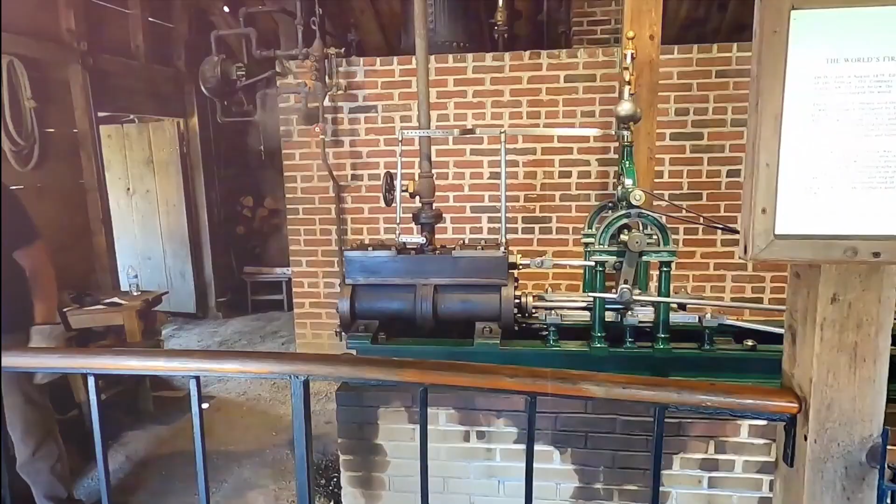Edwin Drake's first device for drilling oil isn't similar to oil rigs today. It was actually called a Drake well. Drake adapted technology from salt drilling. They began drilling using steam-powered engines to ram a drill bit into the ground repeatedly. After the drill reached bedrock, about 32 feet down, they ran into problems with collapsing walls and water-filled holes. To solve this, they drove cast iron pipes into the ground to stabilize the borehole, which was a key innovation.

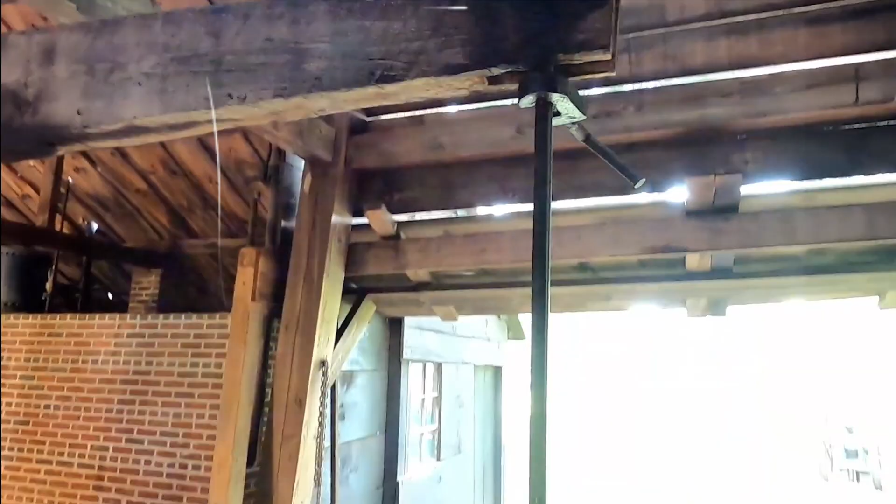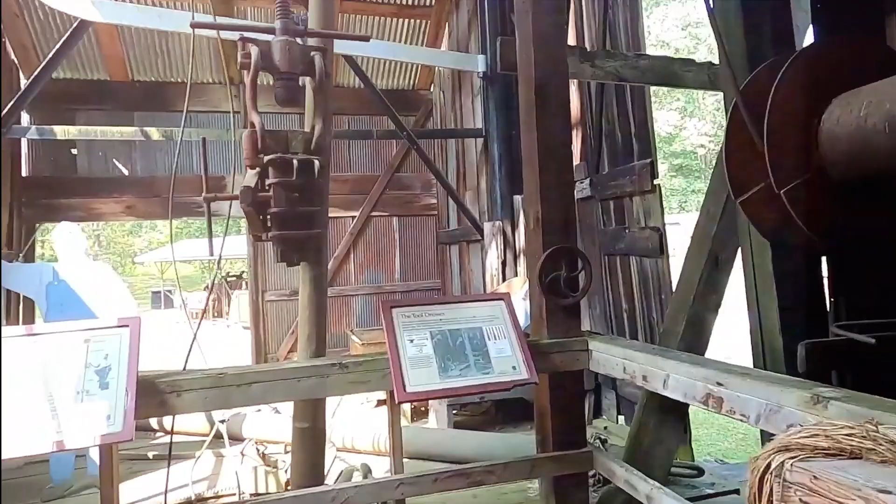The wooden engine house would have needed space for the walking beam mechanism, which rocks back and forth to drive the drill. It would also house a steam engine with its boiler and flywheel, and enough vertical clearance to handle the rig's cable system and pipe sections. A modest estimate would put the height of the engine house at around 20 to 25 feet at the peak of the roof. These were often built with gabled roof to allow extra clearance and ventilation. The floor area might have been approximately 12 by 20 feet, just enough space for machinery and a couple of workers to maneuver. On August 27, 1859, at a depth of 69 feet, the drill struck oil.

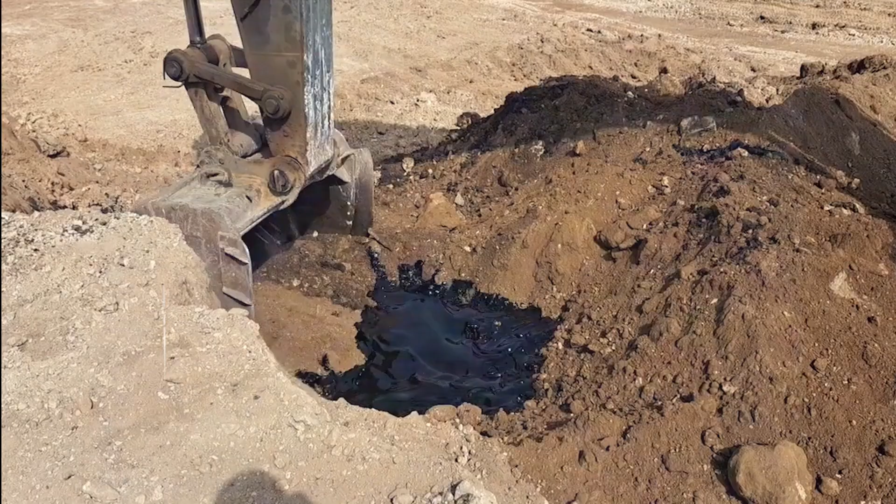It didn't gush out like we see in Hollywood movie scenes. It seeped up slowly, but that was enough. Enough to prove that oil could be tapped like water from the water table. It was enough to change the world. Drake didn't patent his method, so he died in poverty. But his grit lit the fuse of the petroleum age. Others rushed in, copied his techniques, and made fortunes.

John D. Rockefeller became the major beneficiary of Edwin Drake's toils. In contrast to a life of unfulfilling grind, the rise of Standard Oil and its founder, John D. Rockefeller, was swift and has remained sustainable till today. The Rockefeller family is still this very day a prominent American dynasty renowned for building one of the world's largest fortunes in the oil industry.

When the US government broke up Standard Oil in 1911 for violating antitrust laws, Rockefeller didn't lose his wealth, he multiplied it. The breakup created dozens of companies, many of which became giants like ExxonMobil and Chevron. Rockefeller held shares in almost all of them. His fortune ballooned to what will be over $400 billion today, making him the richest man in America at the time. The wealth became generational. The Rockefeller family established trusts, family offices, and philanthropic foundations. They invested in real estate, banking, and education.

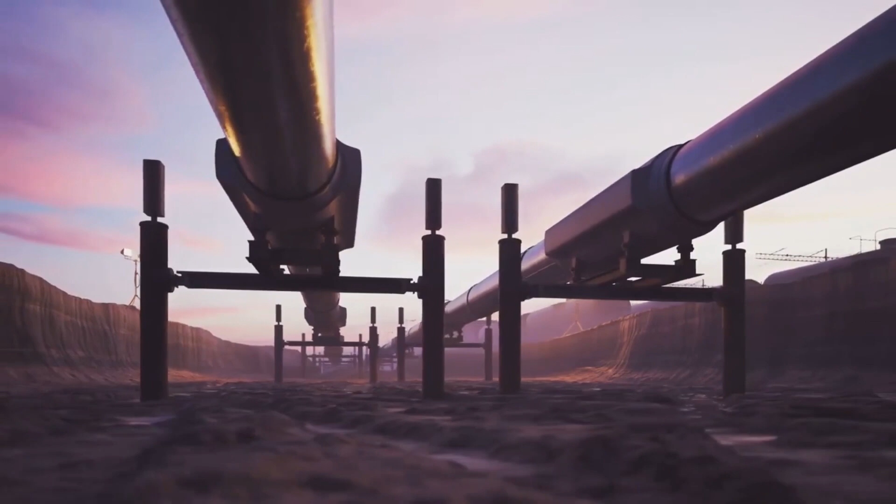The basic process of drilling for crude oil hasn't changed the fundamentals, but the technology surrounding it has seen significant advancements. Techniques like 3D and 4D seismic imaging, unconventional extraction methods, robotics, and data analytics have revolutionized various aspects of the oil and gas industry, improving efficiency and reducing costs.

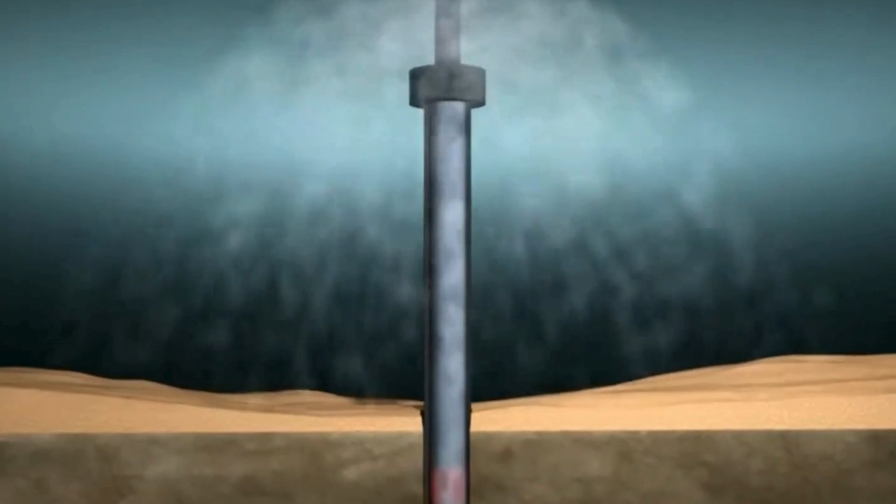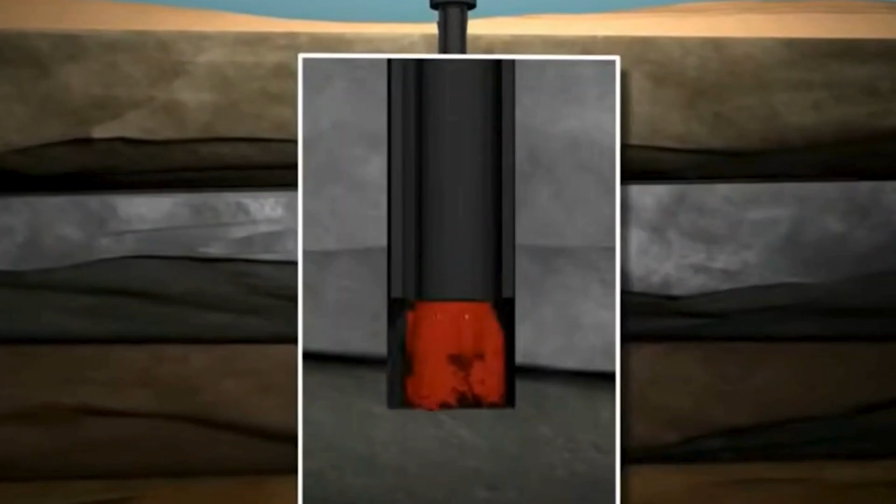Automation and robotics are playing an increasingly important role. Computer-controlled systems can drill more precisely and efficiently, minimizing human intervention and improving safety.

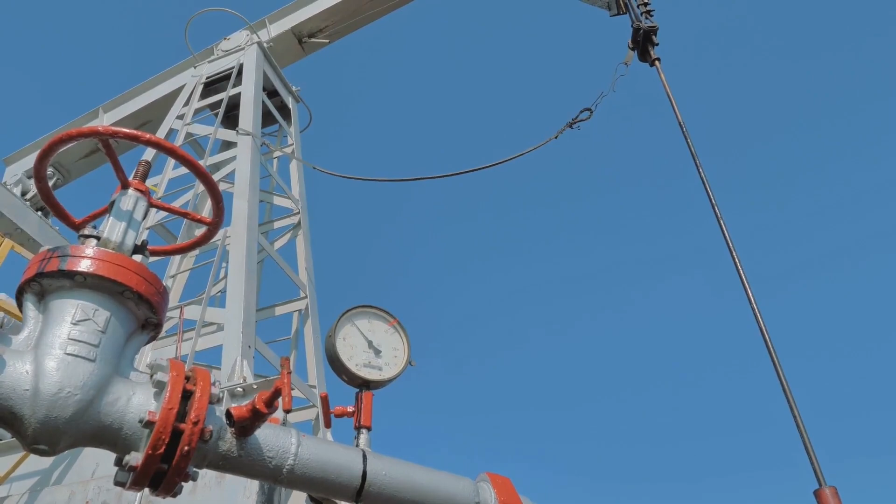Advanced techniques like hydraulic fracturing have unlocked vast reserves of oil and gas that were previously inaccessible. The use of data analytics, artificial intelligence, and digital twins allows companies to monitor operations in real time, optimize production processes, and predict potential issues.

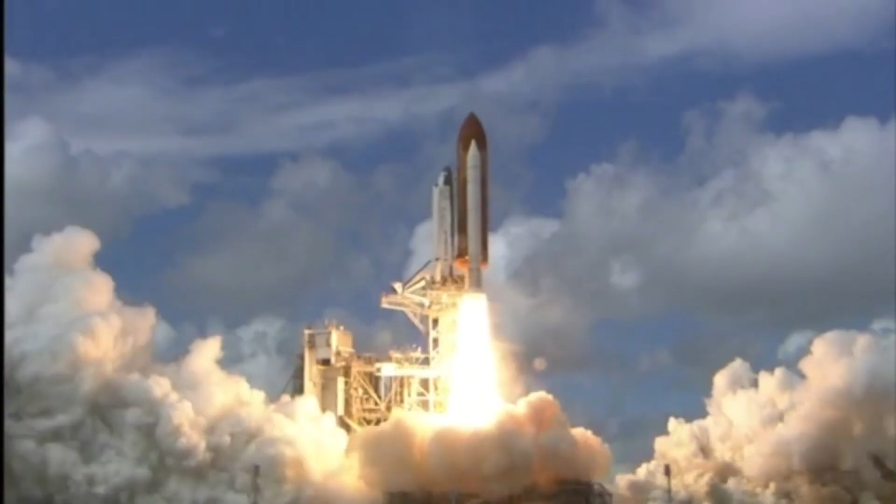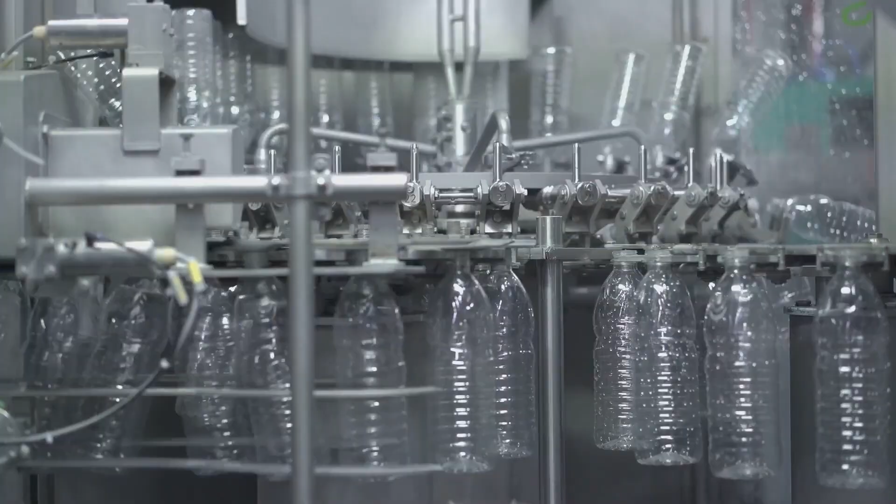Today, crude oil is primarily used to produce energy for transportation. Let's think of gasoline, diesel, jet fuel. It also serves as crucial feedstock for the petrochemical industry, which creates thousands of everyday products, including plastics, solvents, synthetic materials, and chemicals for health and cleaning supplies, as well as fertilizers and pharmaceuticals.

It's used in furniture, and then it's also used in electronics. It's used in sporting. You have balls, you have surfboards. They are all oil and petroleum products. So I think, if you're listening to this video, the next time you go out, try to spot, if you can, as many petroleum byproducts as you can see.

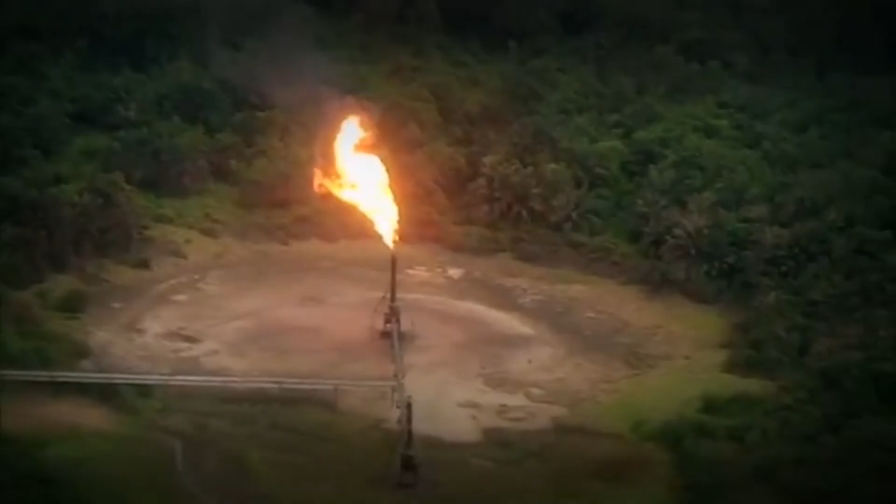So now let's talk about the cost of oil and its impact on the environment. Oil exploration, extraction, and use have numerous detrimental impacts on the Earth's environment and ecosystem. These include air and water pollution, climate change, habitat destruction, and harm to wildlife.

Oil and gas operations release harmful pollutants into the environment, including greenhouse gases like carbon dioxide and methane, which all contribute to climate change. These pollutants also contribute to smog formation and respiratory problems.

We have an interesting video that talks about air pollution in Pakistan, which is, I think, the second most polluted country in the world, and part of the reason why they experience that much pollution is due to oil extraction activities. That's one of the reasons; they have a couple of other reasons.

Oil spills, leaks, and improper disposal of drilling fluids can contaminate surface and groundwater sources, harming aquatic life and potentially affecting drinking water.

Drilling activities, pipeline construction, and oil spills can lead to soil contamination, loss of vegetation, and habitat destruction. The burning of fossil fuels, including oil, releases greenhouse gases into the atmosphere, trapping heat and leading to global warming and its associated consequences like extreme weather events.

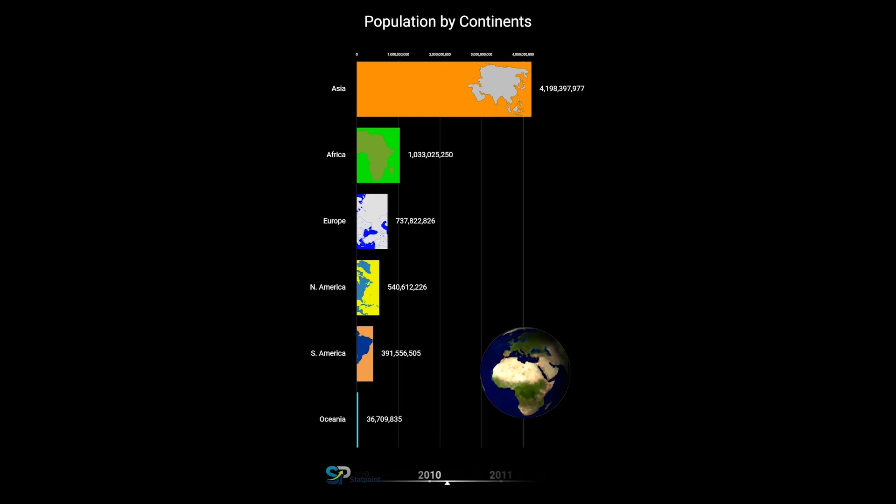The impact of crude oil on the environment far exceeds what the layman could even imagine. And in 2015, it was a problem the world could no longer ignore. The UN set up the SDG goals after much pressure to balance some of these impacts.

And just as in the oil rush, companies rushed to find oil, new inventors were similarly on the hunt for a cure.

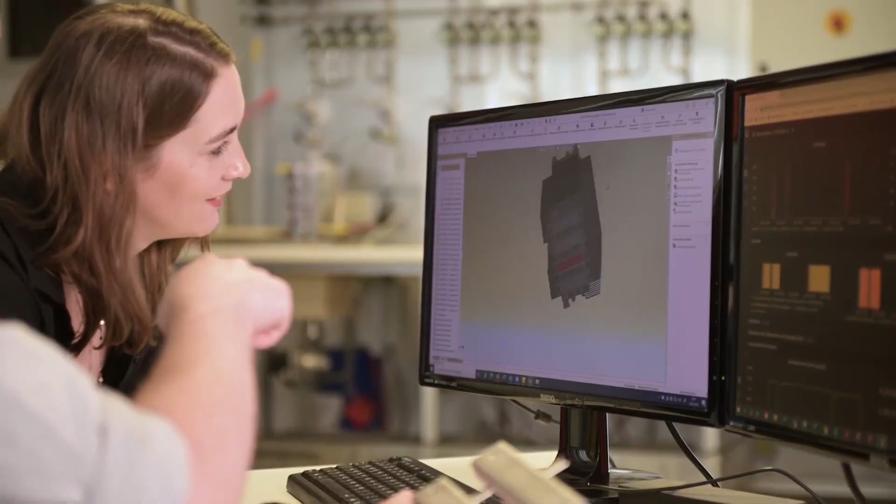One of such companies is Siqens. Siqens is an electrochemical technology company for power generation and hydrogen infrastructure. Established in 2012 in Munich, Germany, Siqens has developed innovative technologies for power generation and key applications in hydrogen separation, purification, and production. Siqens' unique HT-PEM platform has been developed in partnership with BASF and offers significantly increased tolerance to gas feed impurities, opening up a wide range of applications in the H2 economy.

In 2019, Siqens brought to the market its first fuel cell product, the EcoPort 800, as a replacement for diesel generators. The EcoPort 1500 was launched in 2020. In 2022, Siqens leveraged its experience of commercializing its HT-PEM fuel cells to develop technology for separating high-purity hydrogen from gas blends in gas networks and industrial processes.

Siqens currently employs 30 people with a broad range of expertise in the fields of electrical engineering, mechanical engineering, material science, electrochemistry, and energy. We had an amazing opportunity to sit with the CEO of Siqens, Dr. Thomas Klaue, to learn more about Siqens' technology, the growth made by its technology, and the impact on the environment.

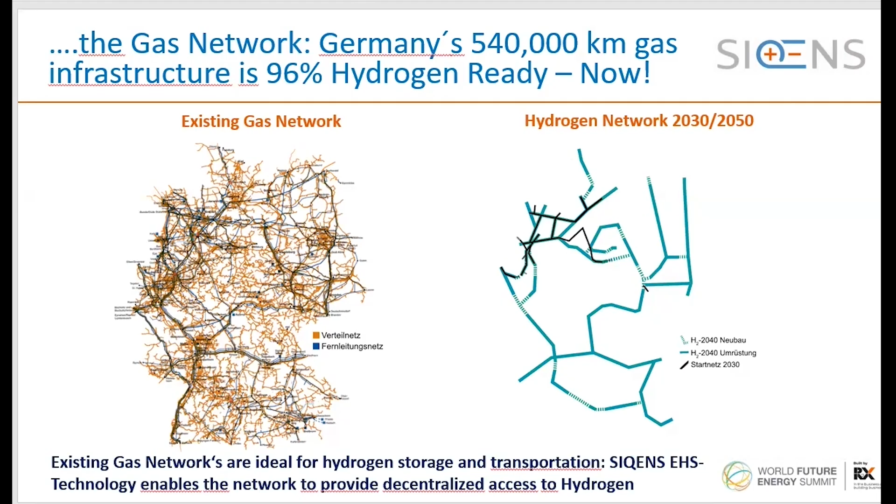We need a centralized production for economies of scale and a decentralized distribution for the supply at the point of use. And of course, the best way is to use an existing infrastructure, and I assume a country with oil and gas like Nigeria already has an infrastructure in place, so that you can use this by blending the hydrogen into the gas network. So this is a German example. Germany's gas network is 96% hydrogen ready, which means that we just need to blend it in and deblend it. And this is how it could look.

Here we have the University of Landshut in Lower Bavaria. They are using our technology to produce hydrogen out of biogases. It's a rural area with a lot of farmland, so they have a lot of biomaterials. And out of these biomaterials, they make biogas. And in the biogas, we have about 45 to 50% hydrogen, which we can then separate in a highly purified manner.

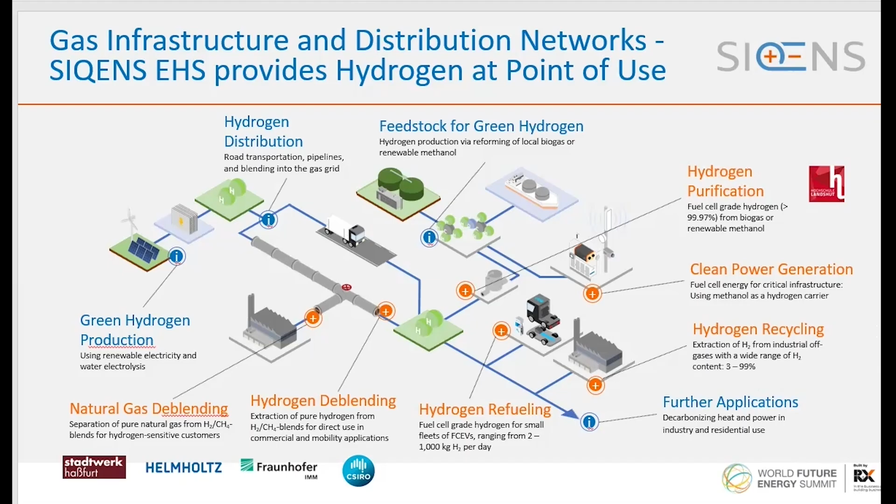Or what you see here is hydrogen recycling. That's what I mentioned. We are here in the semiconductor industry. The off gases of a chip factory, which is basically close to a chemical plant. There's a lot of process gas with hydrogen, and we can recycle that at very economically useful conditions. Yeah. So, a couple of demonstrations, for example.

This, the left side, this was with Australia, where we showed in January this year that we can separate hydrogen and helium in a very efficient and economic way. So we had super clean hydrogen and super clean helium. Here, we assume, a big order is to follow soon.

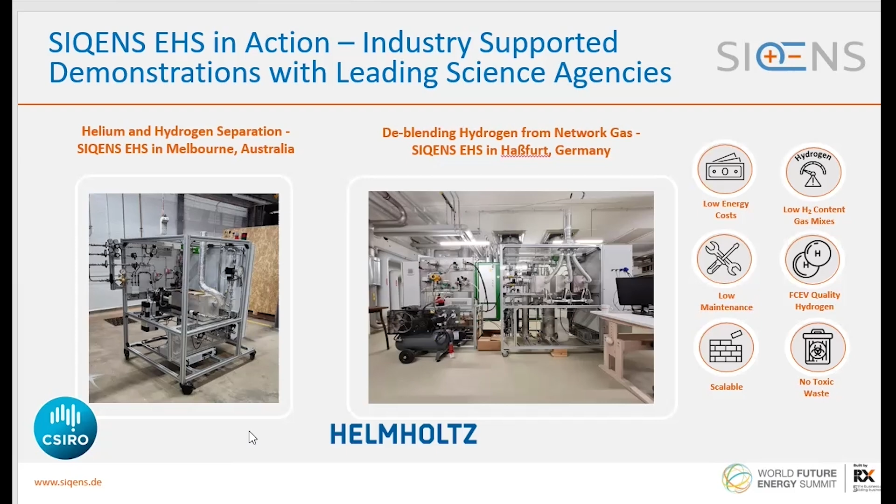And on the right side, you see the deblending facility, where from the local gas network of natural gas, we could deblend hydrogen in a very pure form as well. That's actually the way it works. What we developed is the SIQENS HT-PEM hydrogen solutions.

HT stands for high temperature. High temperature is important because low temperature is very sensitive against impurities. And usually in the gases, when there's hydrogen, you always have a lot of impurities. And the high temperature PEM is able to deal with that. So it's very robust against impurities.

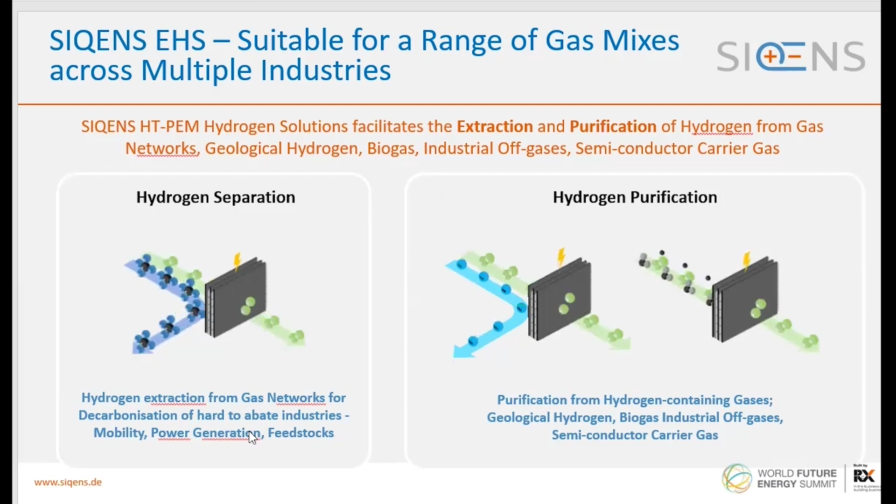And it works basically in a way that we separate with the MEA. The MEA is designed in a way that only hydrogen protons can travel through, and on the other side, the proton is getting an electron back, and here becomes pure hydrogen, and all the rest leaves. So this is basically how it works.

So it works like we have a special membrane which we developed. The membrane has the ability to bind the hydrogen molecules. And then in the next step, the molecules of hydrogen will lose one of their electrons, becoming a proton. Only protons can travel through to the cathode, and at the cathode side, they're getting back an electron. And here, the only thing you now have is highly purified hydrogen. All the rest is on the off-gas side.

And here, quickly, some economics. You know, an electrolysis needs between 45 and 55 kilowatt hours for 1 kilogram of hydrogen, plus on top about 10 liters of highly purified water. That's, by the way, one of the challenges in Namibia. They have a lot of green power, but water is an issue because it's in the desert, so it's dry.

And for 1 kilo of hydrogen, you need 10 liters of highly purified water, plus a lot of electric power. Then you have 1 kilogram of hydrogen, and that contains 33 kilowatt hours, which means you invest about 1.5 times the energy in electric power than you later harvest as energy content in the hydrogen. So electrolysis is a very, very inefficient process. Yeah, quite wasteful.

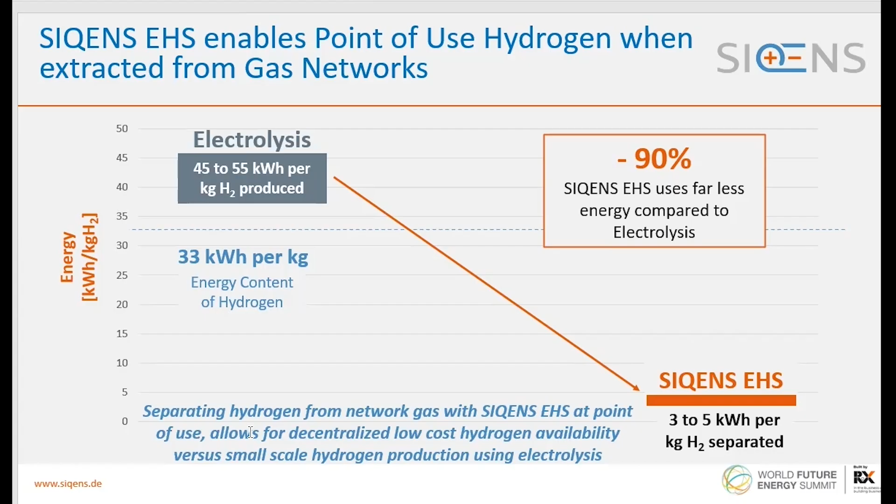And what we do, we collect the existing hydrogen and purify it, whereas electrolysis goes into the molecular structure. Electrolysis destroys the water molecules. And if you get into the molecular structure, you always need a lot of power. Since we leave the molecular structure as it is, we just collect what is there and separate it. This is why we need only a very small amount of electric power.

Then what is also interesting, we spoke about this with the gentleman from Saudi Arabia, diesel site elimination. In Saudi Arabia, in the city of Riyadh, air pollution is extraordinarily bad, because the electric energy is mostly coming from huge diesel gensets, poorly maintained, blowing a lot of dust into the air. And so they are really interested in diesel site elimination by fuel cells.

And methanol is a very cheap thing to be made, either green or based on oil, of which Nigeria has a lot. You can use the methanol then to run the fuel cell, because methanol is a very, very good hydrogen carrier. Actually, methanol is probably the best hydrogen carrier on the globe with regard to the overall weight of the carrier in relationship to what you get as hydrogen.

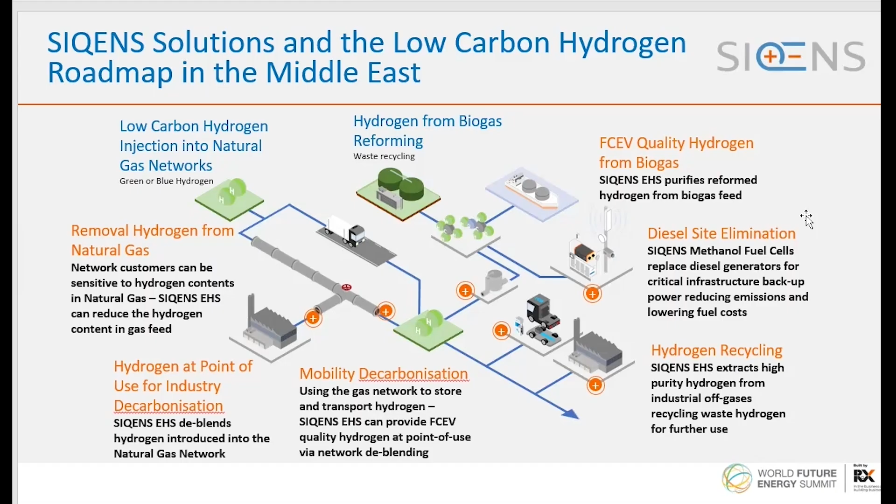Which is why we think that methanol fuel cells are the right thing to go with, using methanol as a carrier for hydrogen. Yeah, so this is basically an overview of what we are doing. Our solutions are on the power supply side with our fuel cells and the cabinet, which you see here. This is a fully independent power generator with no exhaust gases, no pollution, or here the separation of hydrogen out of basically any feed gases, and quite robust against all sorts of impurities.

So I think one of the second questions I had is to figure out what SIQENS' goals are for the next 5 years. What are some goals that the team is currently prioritizing? Okay, our goal is to grow.

Let's start with the power generation. On the power generation side, we are currently working on larger fuel cells for more power. This was actually driven by the shipping industry. There is a demand to even replace diesel generators in ships, or diesel engines in ships, by methanol-driven fuel cells.

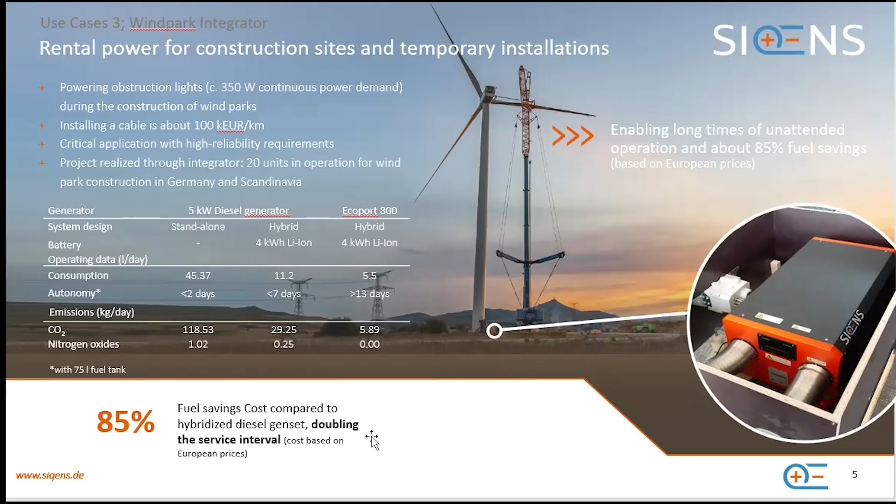And this is the cost based on Germany. In Germany, a liter of diesel is about €1.50, €1.40. Methanol is about 50 cents, maybe 60. Green methanol is 70 cents. So in Germany you have cost savings of about 85%, plus you have no maintenance because it's an electrochemical process. Nothing turns, nothing needs to be lubricated. There is no change of oil. No mechanical moving parts.

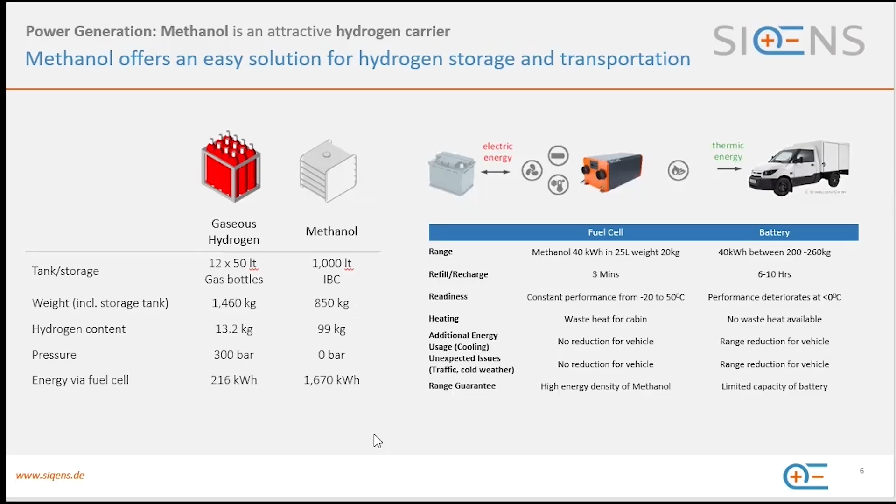If you use methanol, you need our system, which is a system generating the hydrogen out of the methanol, which then goes to the fuel cell, to the stack. It's cheap: wherever you have oil, you have cheap methanol, which is the case in KSA. It should be the case in Nigeria. And methanol is a really good carrier for hydrogen because the weight is low.

Second, it's not a big pollutant, so if you spill it, it's not like diesel or petrol. You may use methanol in naturally protected areas because it's harmless, and you can transport it in just a plastic container, which makes it very suitable for many off-grid situations. So where you only have access by helicopter, they have our fuel cells for border control, border monitoring, things like that.

Most suppliers need a premix of half water, half methanol, which means you carry around 50% water. In our case, you can have pure methanol, because we have another trick internally in our process, dealing with the methanol in a way that beside the hydrogen there is some water generated out of the methanol as well, so that this moistens the membrane. And on top, the efficiency of our fuel cell is probably the best worldwide. Yes, that sounds really great.

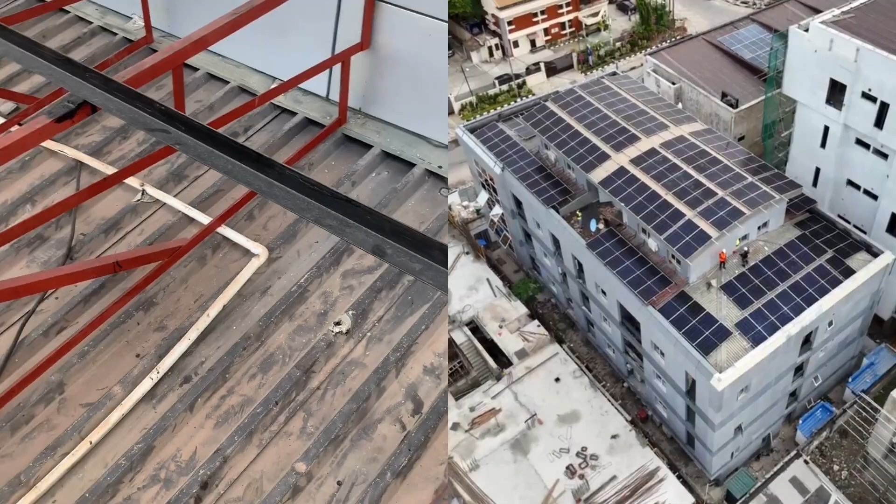I mean, you educating me on how much pollution is caused by just purifying these gases is revelatory to me. So, Red City. Yes. So we do construction, we employ sustainable engineering practices with our construction.